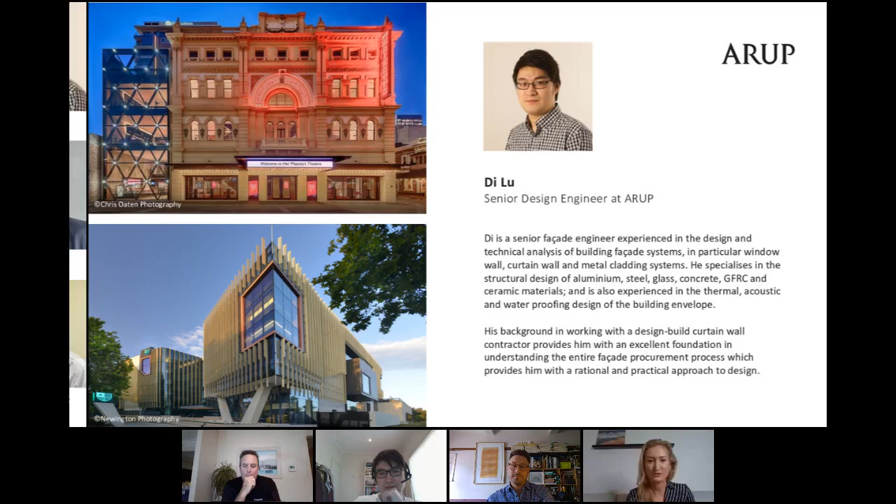Now, to give you a bit of background on how we put this workshop together: we had a big internal meeting, and after about an hour's discussion, we realised that none of us could really agree on exactly what a rain screen facade is. So we thought we needed to get an expert opinion to set the record straight. And I'm glad it wasn't just us - Di Lu suggested there are quite a few different sources with different opinions on what it actually is. So we're really glad to have him jump in and let us know.

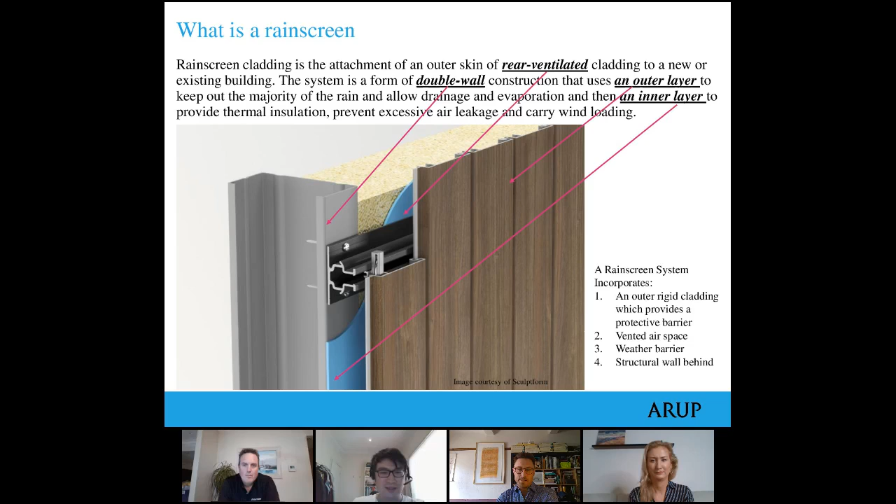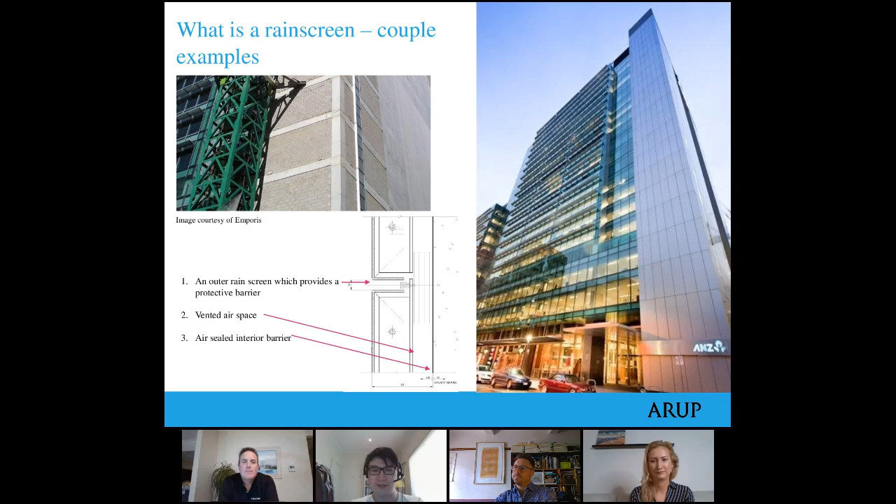Let's take a look at a couple examples. The first one is the ANZ house in Adelaide. As you can see from the image to the left, the lift core and the entire western elevation are built out of precast concrete and concrete filled block wall. An open jointed aluminium cladding is then installed afterwards to turn the facade into a rain screen cladding. As you can see to the bottom left, the aluminium cladding is the outer layer, followed by approximately 50 mil air gap between the cladding and the wall, and the structural wall forms the weather barrier.

Here's a second example, which I trust is seen very often in this country: a brick veneer wall in the residential market. The wall is typically made of a non-load-bearing brick veneer that is supported off timber or steel studs. A layer of water barrier, or sometimes called sarking, is then placed in front of the stud frame to form the ultimate weather defense line, as well as vapor control. In our climate, Adelaide or Melbourne, they are often vapor permeable, which allows the moisture in the insulated area to vent to the outside.

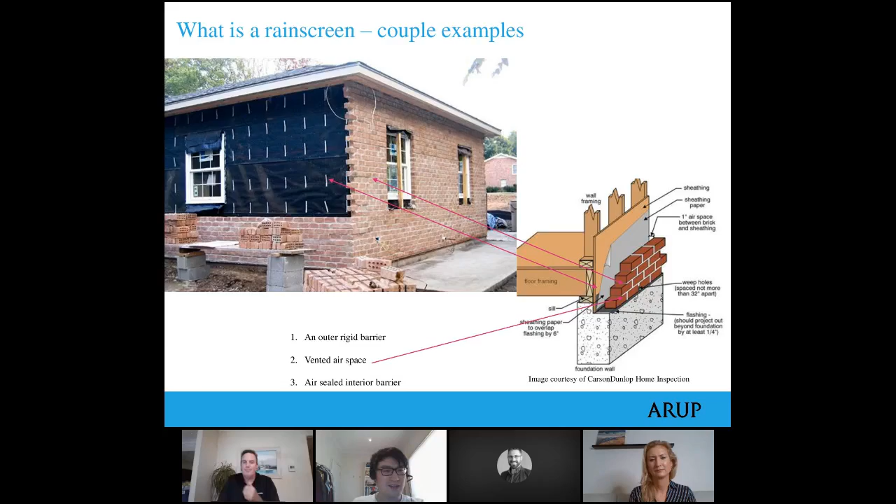Here is a very brief history. The concept of the rain screen has been around for ages, and in the UK, the Building Research Station declared the advantage of the drained and ventilated airspace behind the wall, but it took another 25 years to become commonly practiced. In 1952, the Alcoa building in Pittsburgh, with its cladding of open joint aluminium panels, is one of the first kinds of rain screen cladding. Here in Australia, we do see them being used in quite a few iconic commercial or house buildings across major cities. Having said that, though, the most commonly seen cladding type is still face sealed cladding, on medium-rise residential or commercial buildings.

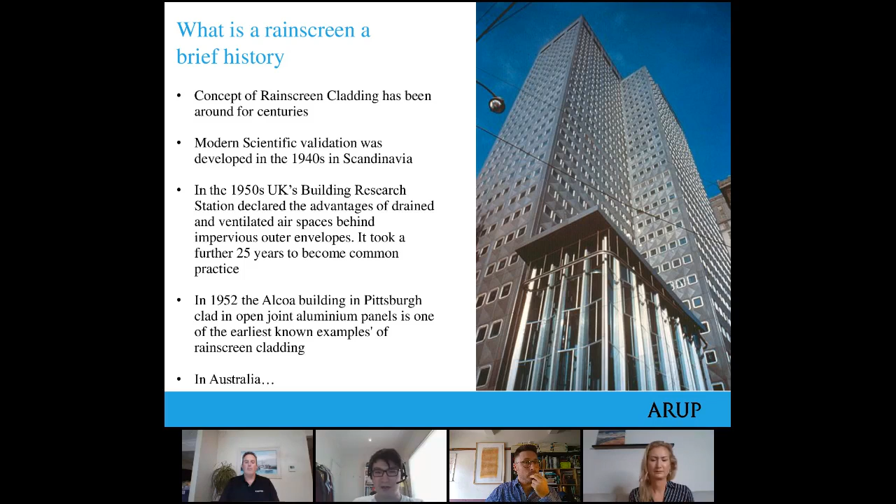So why do we care about rain screen cladding? Why does it matter? I think it's because nobody wants to see this happen to their projects or building. This is an office building in Queensland, and our diagnostic team in Brisbane has been called up by the client to take a look at what's happening to this one. This one has CFC cladding on top of the building. It is a face sealed system.

Basically what they found out on site is that the top part of the sealant of the face sealed system failed, and water started to get in, while the bottom one seems to be sealed a lot better than the top, so it's basically turned into a fish tank. You can see they drilled a pilot hole there, and the water just started draining out. As a consequence of this, all the steel structure behind is rusted, and the whole top part of the building has to be replaced, including the steel support structure.

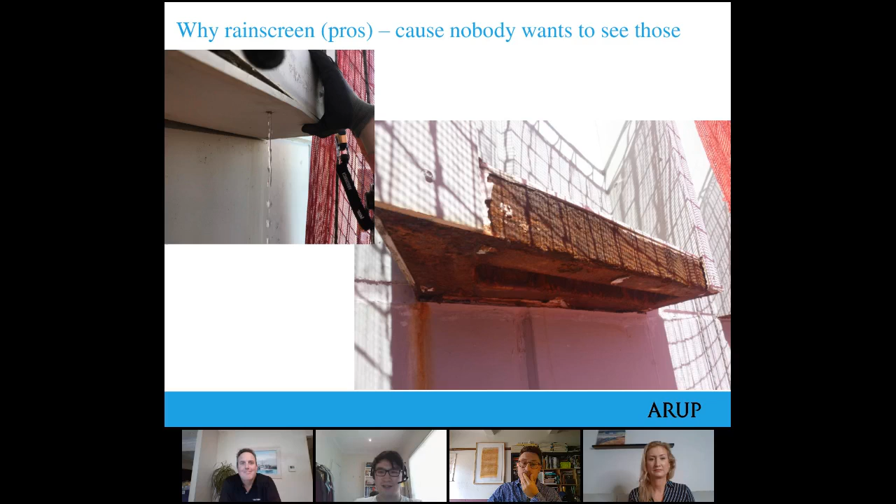Now let's take a look at the working principle of a rain screen cladding. To know how it works, I think it's probably good to first understand how water can get into the building. So there are three elements to a leaky facade: driving force, water, and gaps. The driving force can be pressure, like wind blowing on the facade, or natural gravity, or kinetic energy, which is very common, like wind-driven rain, and surface tension capillary action.

Reliably getting rid of any one of those elements will stop the water coming in. So for a rain screen system, the external skin sheds most of the water and slows down the kinetic energy associated with the droplets. The vented air gap will eventually, or rapidly, pressure equalize with the external pressure.

This depends on the open gap - the bigger the gap, the quicker it equalizes. So the pressure equalization will help to reduce or remove the pressure difference, meaning water is less likely to be driven into the cladding, into the air vented zone.

And then the air barrier stops external air from entering the building. It's worth noting this is also used as a vapor control layer, depending on the climate. In our climate, like Adelaide or Melbourne, it's normally treated as vapor permeable, so moisture trapped inside the insulation or stud wall can escape out, stopping mold formation. This is very important in residential buildings and health facilities.

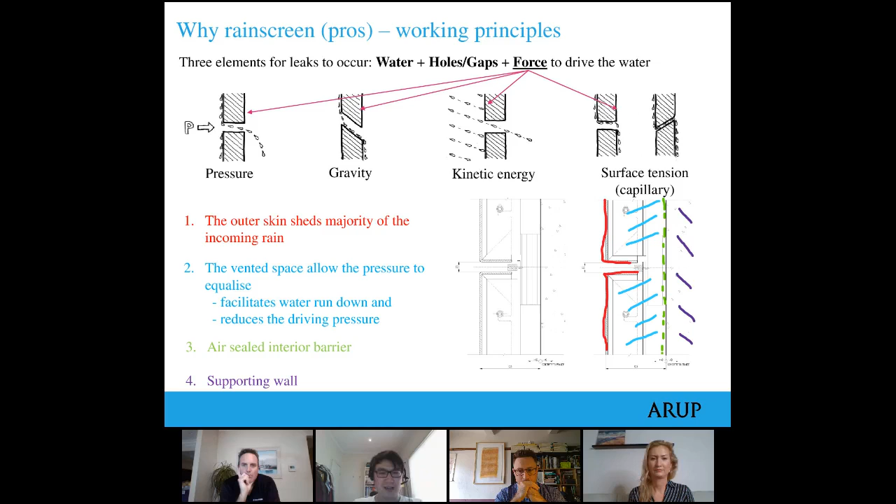Now let's look at a few points to consider when specifying or adopting a rain screen cladding. Rain screen cladding is good, but the first thing to be mindful of is the material of the supporting frame, brackets, and fastener. Due to the nature of open joint systems, the supporting frame and fixings are exposed to the external atmosphere.

This is the difference between face-sealed and rain screen open joint cladding. So care needs to be given to material and coating selection to prolong its design life against corrosion. Secondly is the rigidity and strength of the weather barrier, which is the inner skin of a rain screen cladding.

Again, due to the open nature, this layer is subject to external wind load. So when it comes to material selection, we need to make sure it's suitable for the location and wind pressure of the building.

A solution in the Australian market to this problem of rigidity and strength is the James Hardie RAB board, which is vapor permeable and also a rigid board. It's pretty good to use on commercial buildings.

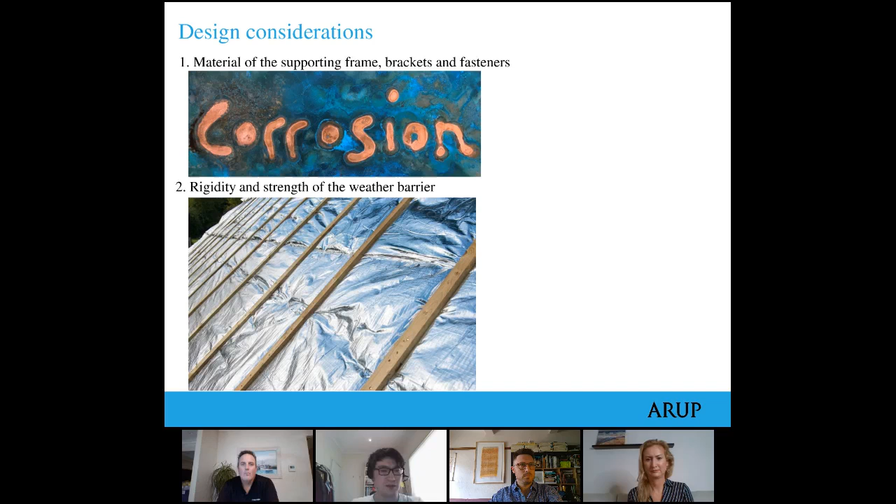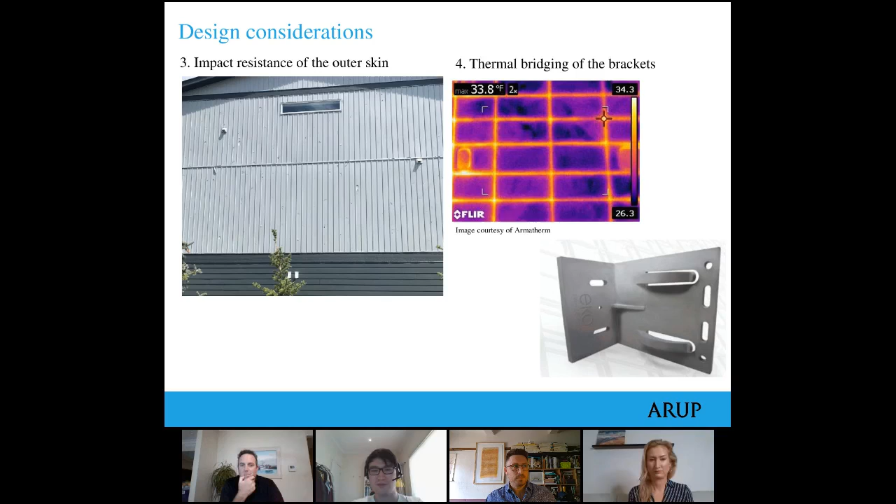Last but not least, thermal bridging through the brackets or fastenings. We're in the era of the National Construction Code 2019, and Section J of the code has highlighted the disadvantages and what thermal bridging can do to the thermal performance of a wall. The picture to the bottom right is a composite bracket, which helps reduce thermal transmission.

Now let's look at some of the most commonly used cladding materials. The first one is aluminium. It has been used extensively given its durability, range of color options, lightweight nature, and ease of fabrication. They normally come in two forms: coil product or extruded product. With coil product, they are typically folded into cassettes, which are then installed onto the wall.

One thing to consider when using coil form product is distortion, often referred to as oil canning. This could result from locked-in stress in the fabrication process or buckling of the sheet due to thermal expansion and contraction. This will impact the visual appearance of the cladding.

Extruded product can come in a variety of different shapes, giving the designer flexibility to choose the profile they want. Another good thing about extruded aluminium cladding is that it usually comes with better tolerance than folded coil products, giving better flatness, which is desired in architectural applications.

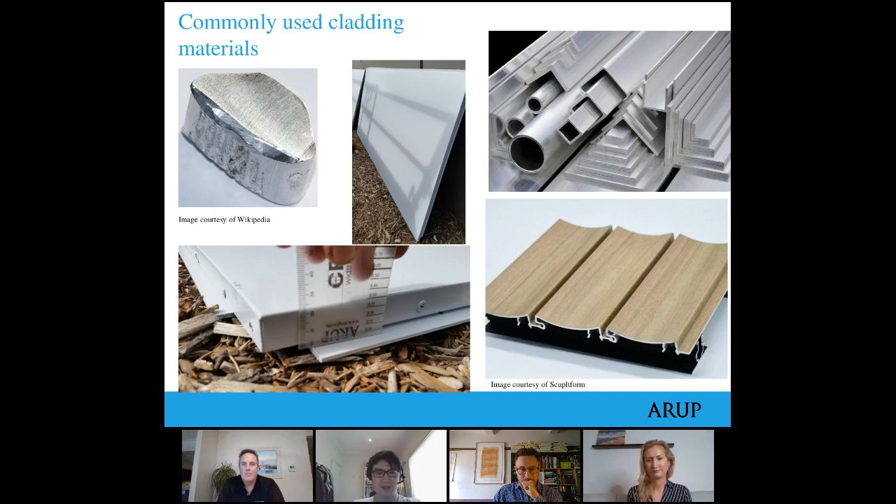The next one is steel with the good old polyester powder coating on galvanized coil steel, commonly known as Colorbond. The steel cladding is a popular choice in mild to moderate corrosivity environments. They are often used in industrial buildings, and actually used pretty much everywhere: schools, industrial buildings, offices.

Similar to coiled aluminium cladding, they are fabricated into cassettes or interlocking panels, like the one shown in the top left corner. Similarly, oil canning is a concern and needs to be considered at the design stage. The next one is terracotta.

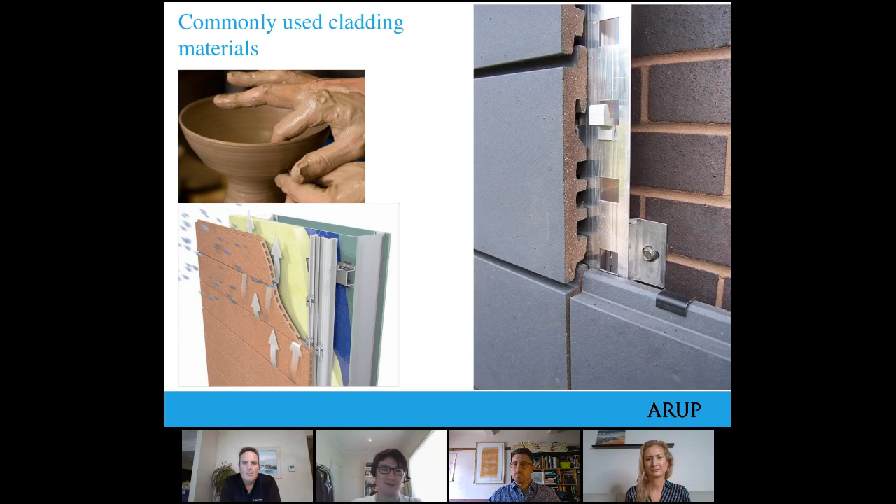And lastly, of course, our timber and composite aluminum panels, which are normally often used in low-rise buildings or interiors.

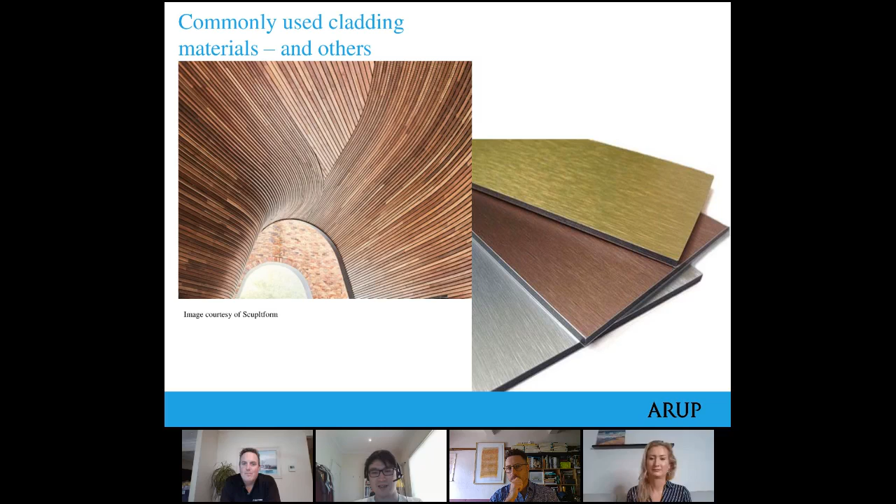But one thing to mention is that they are only on external skin. They are only applicable to Type C construction when in accordance with the National Construction Code, when non-combustible cladding is not required. And yeah, I think that's pretty much it.

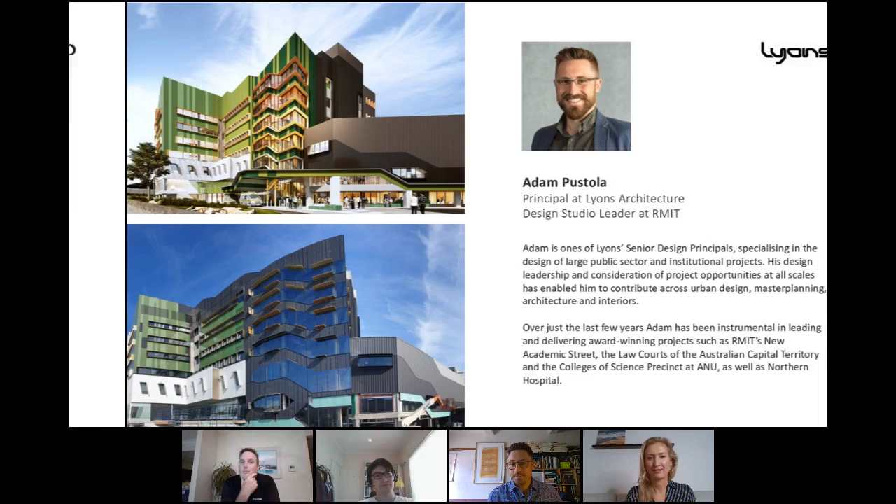And I will also mention how we selected this particular project. Again, we asked Dee, hey, do you know a really good example of a rain screen facade? And he actually mentioned Northern Hospital. So we were very lucky to be able to track down Adam, and he's very kindly agreed to come and present what a really good example of a rain screen facade is. So very lucky to have him.

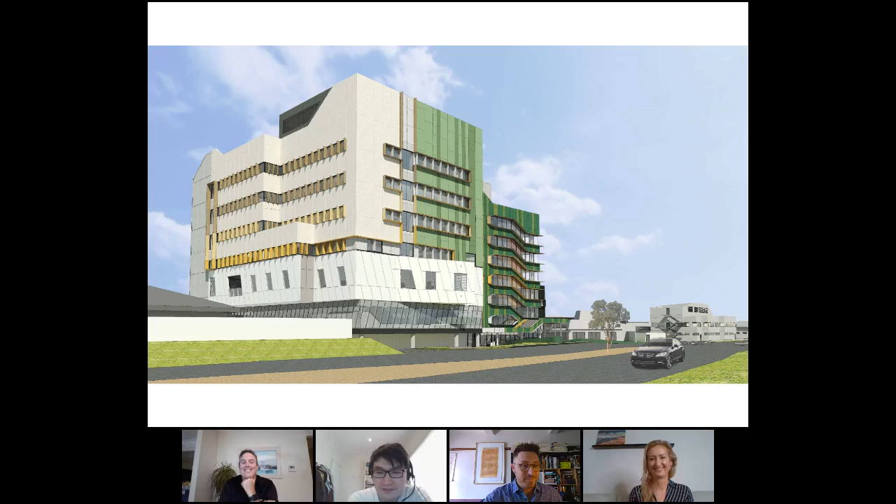We really put a lot of effort into the public face of the project, and we wanted it to be really visible from all around the suburb. This is a growing suburb, and everyone here drives by car, so we wanted strong visibility, just like road signs, like this painting by Jeffrey Smart.

It acts as a key wayfinding piece within the Northern Hospital campus, which has developed from a low-rise hospital—this is their first tall building. We wanted to make a strong statement for the hospital, but also sit alongside the shopping centre right next to it, and alongside a hospital campus that's only going to grow over time and become more key to the community.

These slides talk to some of our design process, where we made the decision to go from what might have been, in a different version of the world, a precast concrete building, to one with a lightweight rain screen facade, which then allowed us a whole range of opportunities.

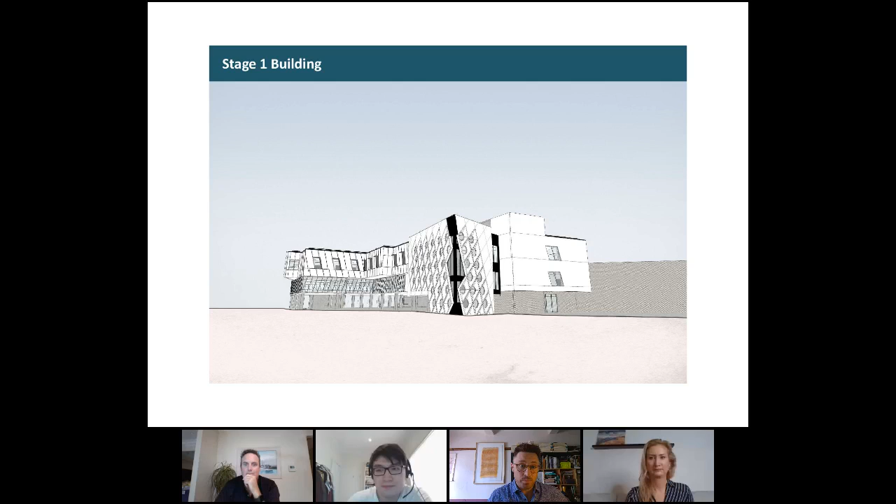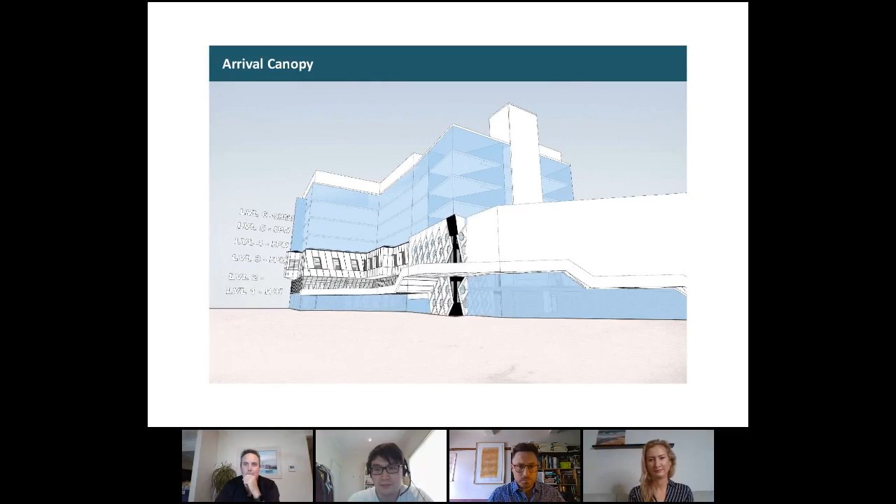We had this three-storey building that we were going to build on top of. There are other parts of the hospital which plug into the project on the lower levels, then we have the four levels of the wards. There's a canopy that comes onto the front of the project, and a big public stair on the corner of the project.

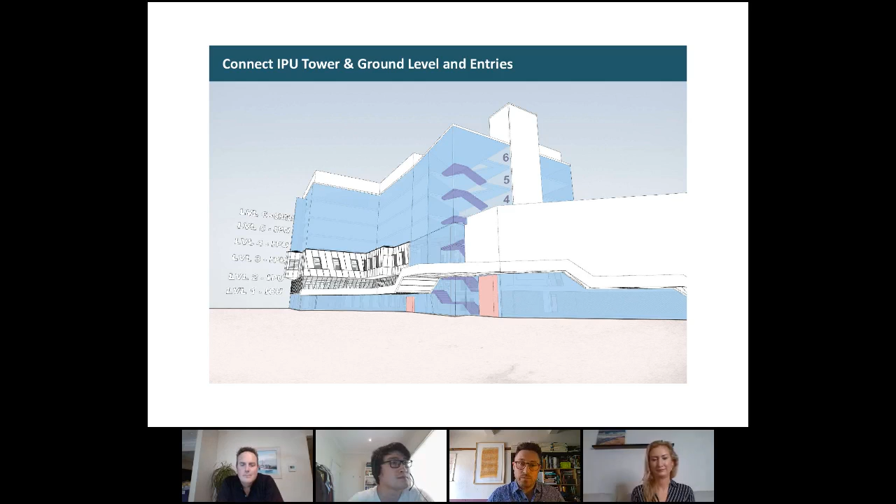What we thought would be really great with the opportunity of a lightweight facade was to actually show that stair on the corner of the project as a key public space within the new hospital building, and then provide really long open windows.

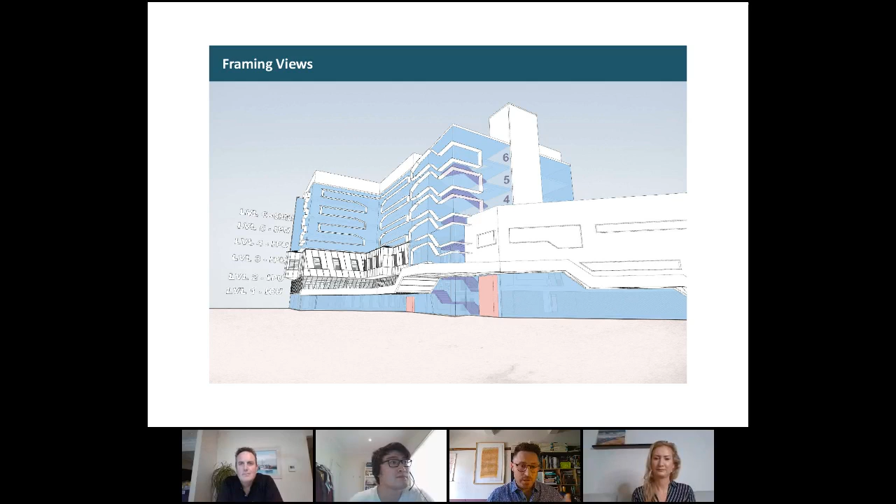We have this great view to the hills of the Yarra Ranges to the north, and using a lightweight facade in this instance allowed us to create these long horizontal windows, a bit different to the first stage building. Rather than smaller windows in a precast facade, we could have long, wide windows, which we think provide a really great benefit for the patient bedrooms.

It also meant that we could bring the colour scheme of the Yarra Ranges right into the interior of the hospital too.

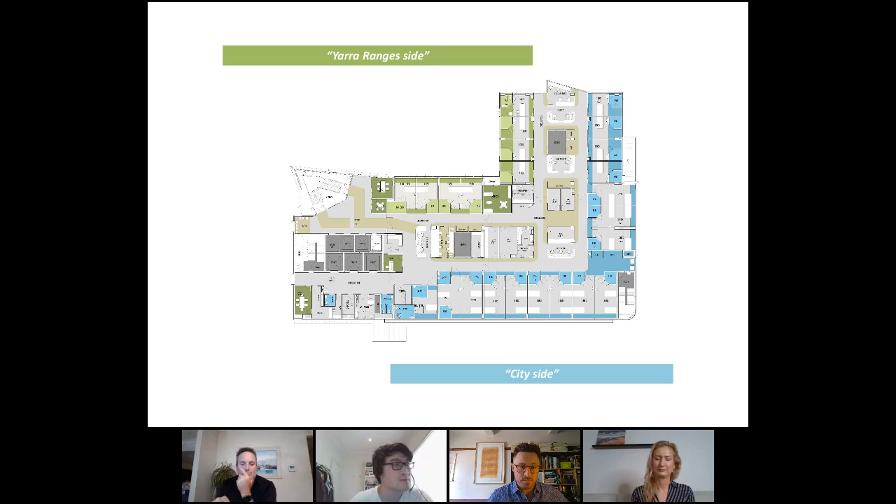Going back to the facade, we set up this idea of the long horizontal windows and showing off the stair. You can see with those windows which fold around the corner there, coloured in pink, that this lightweight facade can actually follow the form of the stair, which allowed us to open up the building towards the Yarra Ranges. So when you step out of the lift or use those stairs, you have this really broad view out to the Yarra Ranges.

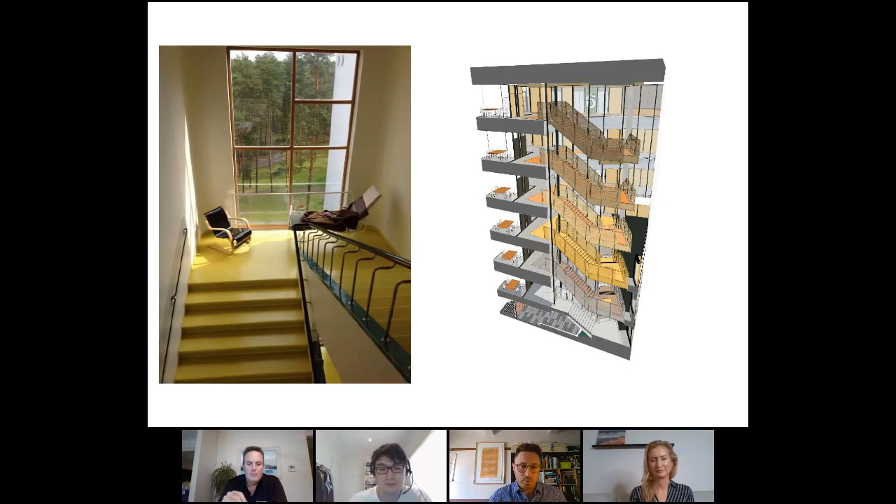Other typologies and examples of hospital buildings having access to landscape, or at least views to landscape, is part of that healing process, as well as having a stair which can be used not just as a transition space, but as a meeting space. But that stair is a whole other story.

We also thought more closely about the colours of the Yarra Ranges and that part of Melbourne. There's actually a really great mural in the foyer of Northern Hospital which shows how connected Northern Hospital is to the outer north of Melbourne.

We did some research on colours from different landscapes around the project, abstracted these through a digital design process, then made it real using RAL, the powder coating fan deck, to choose our colours, and brought it into the rain screen facade using an aluminium cassette system with six different powder coating finishes.

The other thing with the color, again, we want this to be strong, to be striking, to sit alongside things like petrol stations. So the canopy as well has the same color scheme as the facade. It's like a really strong, clear marker of where the front door, the project, is. So the colors of the facade of the rain screen are not just on the building, they're on the canopy as well.

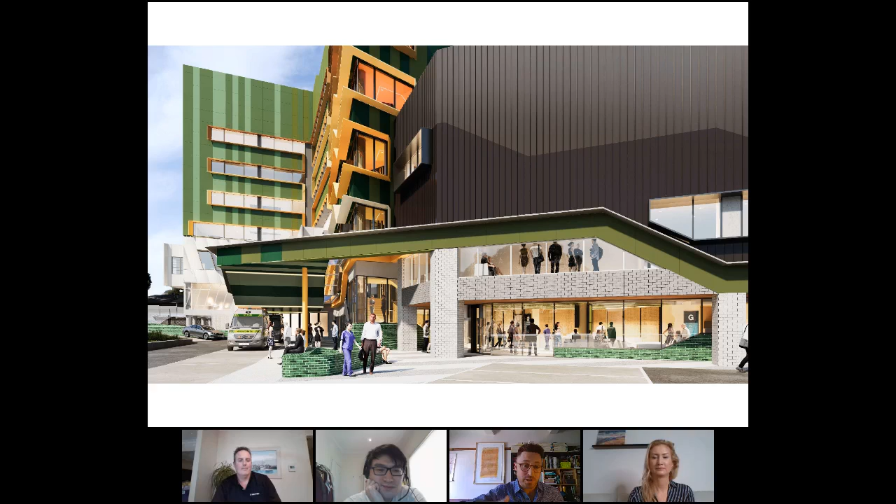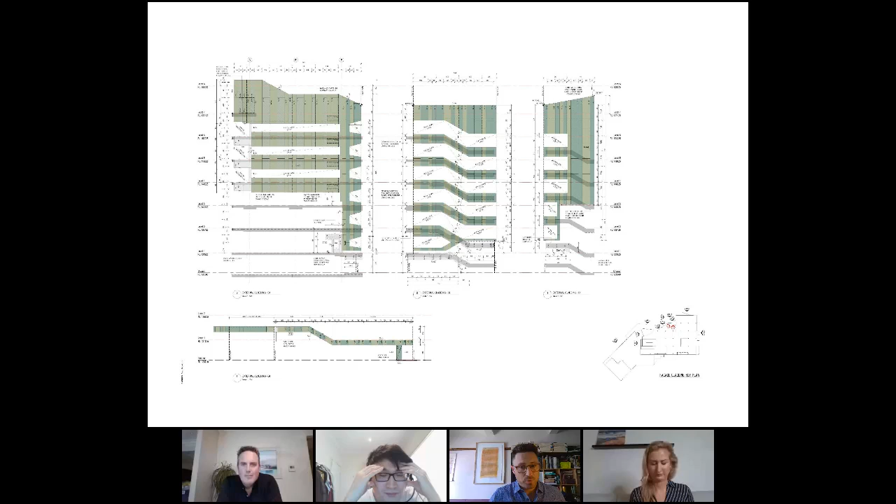We document our projects in Revit, and we document in colour to make sure that we can achieve all of these outcomes. We're able to document the rain screen facade as a separate trade package, pulling out each of these elements of it to allow for easier shop drawing and coordination as well.

The other thing about rain screen facades is they do sit separate to the structure of the building. So for the builder, they're able to build the structure very quickly, and the facade goes in front of that. Being a rain screen, the building interior can be sealed up very, very quickly. A lot of those performance issues, which we all have to deal with now in terms of the higher thermal performance of buildings, the waterproofing requirements, we can deal with much more easily within the one surface, and then there's the outer decorative layer on top of that.

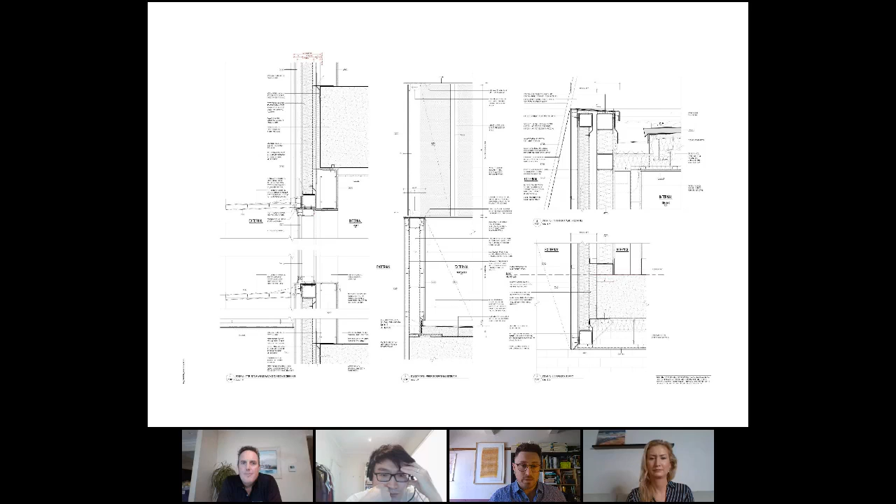The other thing which the rain screen facade allowed us to do was make it a little bit easier to integrate the sunshades as part of that facade. Again, we had so much liberty in terms of the shapes that we were able to make in a non-load bearing rain screen facade, as well as integrating sunshades and obviously all of the colors and finishes that we're after for the project.

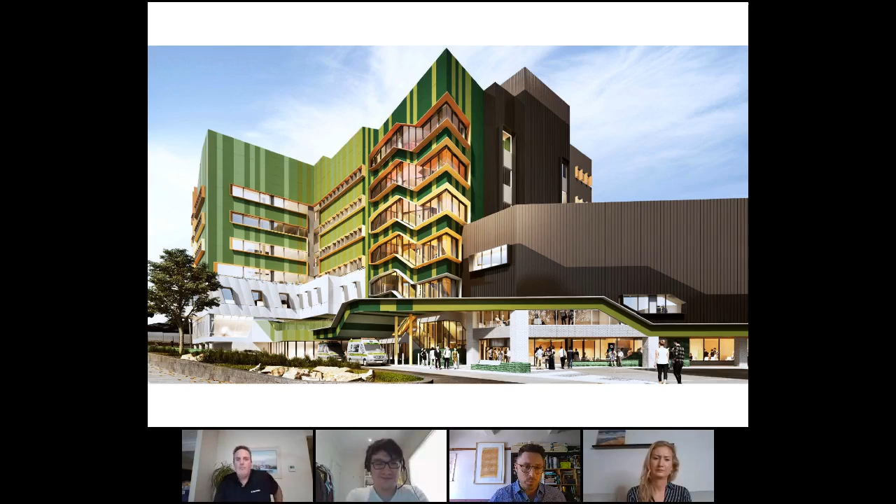Again, making a decision early in the design process, tying it to some of the vision for the project to be a really strong urban project, to be a strong piece of public architecture, allowed us to get to this outcome at the end of the day.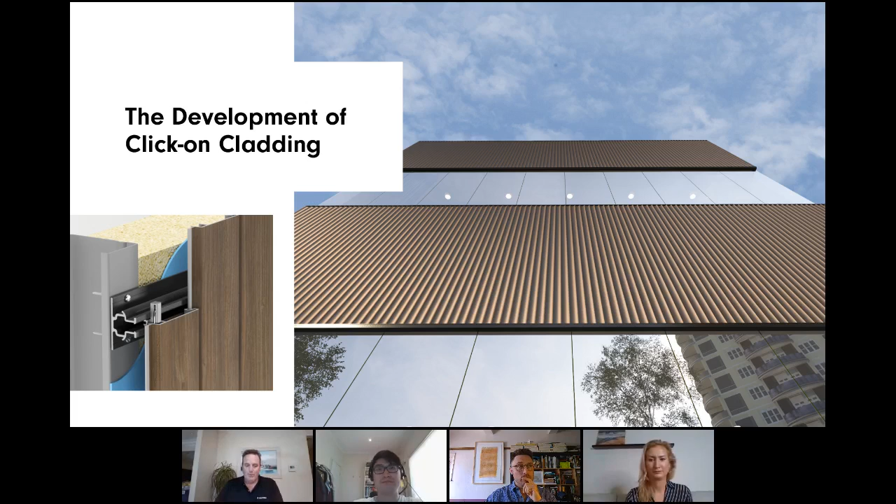It's also non-combustible according to 1530.1. Click-on cladding utilises our proprietary mounting track system, which can be fixed to virtually any substrate. Once the tracks are installed, the boards simply click into the clips, allowing for speed and accuracy in the installation process. We have a range of cladding profiles available that can be combined into any sequence, ranging from fine clean lines to bold shapes.

Different textures can be created using shadows and differing depth profiles. The system also has an element of curvability built in, with both convex and concave curves possible. It can also run in most planes, with vertical and horizontal being the most common. We do, however, have the ability to run it as an angled texture as well.

The system doesn't require any specialist trades. Any carpenter can do it. It is a fully engineered system. We are currently working on a table for wind loads, which, when completed, will accurately guide you to the required track spacing necessary to achieve the loads on your specific project. It can come with all trims and angles required for the install, or we can help configure custom connections to your existing substrates. Overall, it's a quick, simple, and cost-effective method.

I'll show you a short clip now to show you just how simple this thing goes together.

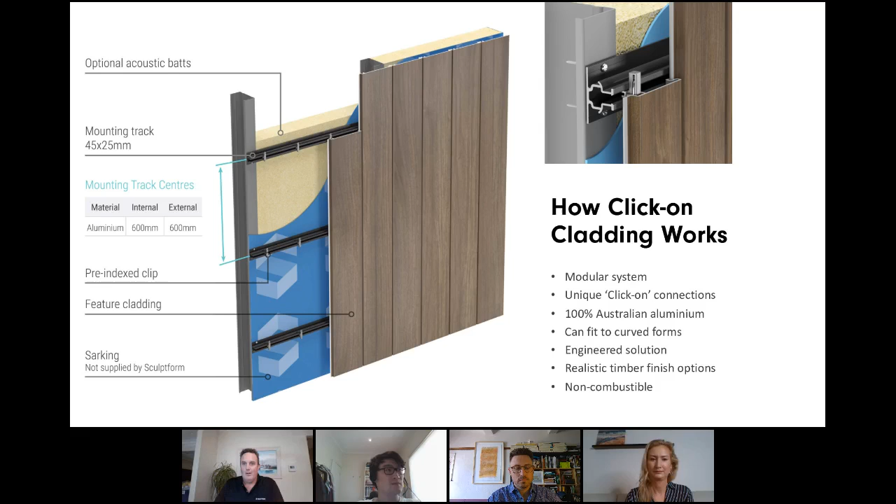So here you can see David installing boards. It's sped up slightly, but it's simply a matter of engaging the tongue and groove and tapping the board into place to set the clip. We also have a click-in angle trim to complete the works. So as you can see, it's quite simple.

Its applications will include facades, soffit elements, interior to exterior transitions, and curved walls and ceilings.

So we have a range of profile suites available. They come in various shapes and sizes. The panel suite has been developed to use in place of aluminium sheet cladding. We have extrusions offering different widths and can adjust the spacing between the boards to achieve a zero gap with that subtle flat texture. It's an extruded product, so it's more durable than the roll-formed alternative, which means it won't oil can in the sun.

Oil canning happens to roll-formed products when they heat up. The material expands, causing an uneven surface. I believe Dee touched on this earlier.

In my experience, moving materials around site, especially large sections of ACP and CFC panel, is problematic. Lifts are usually very small, and not all jobs have access to internal or external craneage. Cladding boards would be easier to move around as they are lighter, narrower, and therefore less prone to damage.

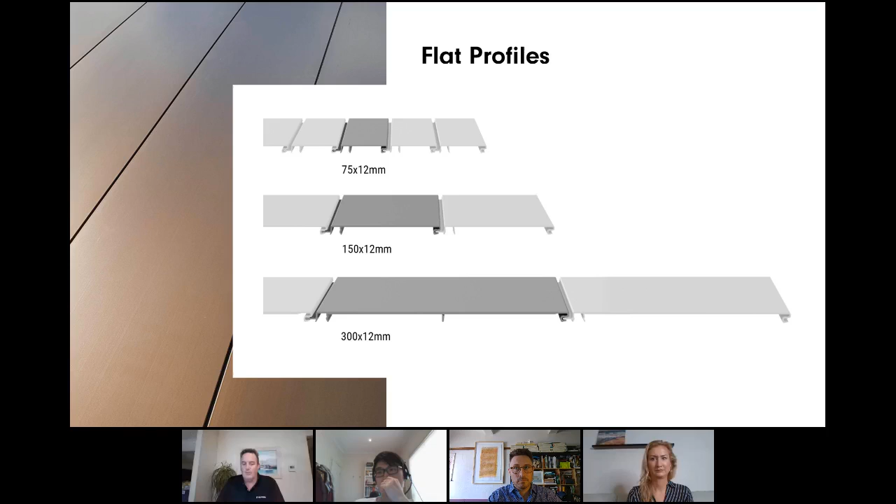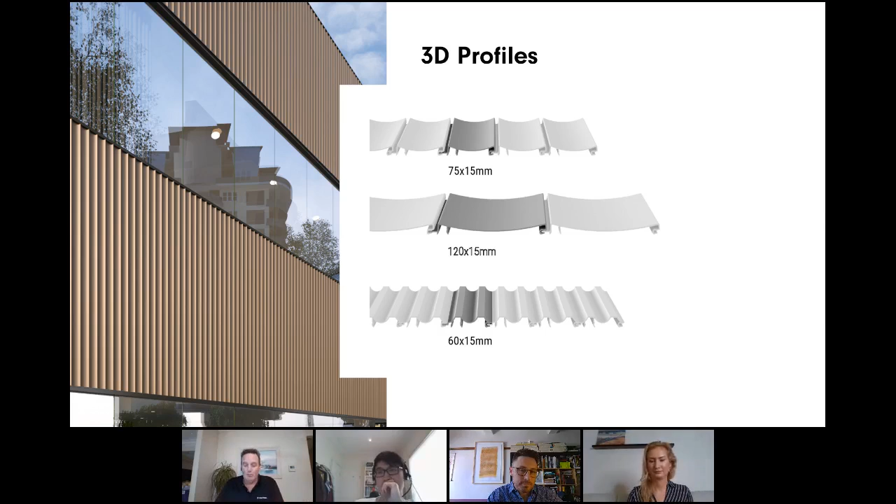We have a range of 3D suites as well. They consist of a single flute profile, which has two widths shown, the 75 and the 120mm board. We also have a double flute profile, which is the 60mm board size.

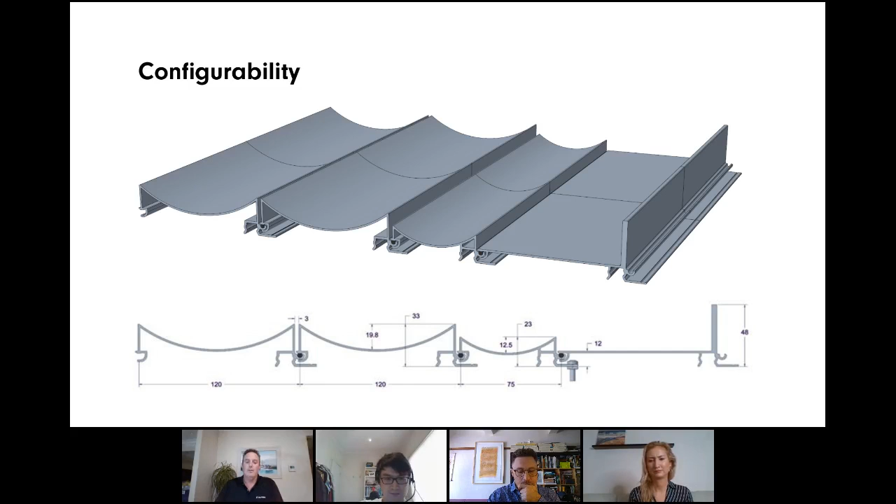This image shows just how configurable this system is. You can combine profiles from any suite in any sequence you can think of. As the system is built on the same foundation, it truly is just the board that needs to change, giving you the ultimate in rain screen configurability. We also have the option of custom shape profiles using the same click and track foundation.